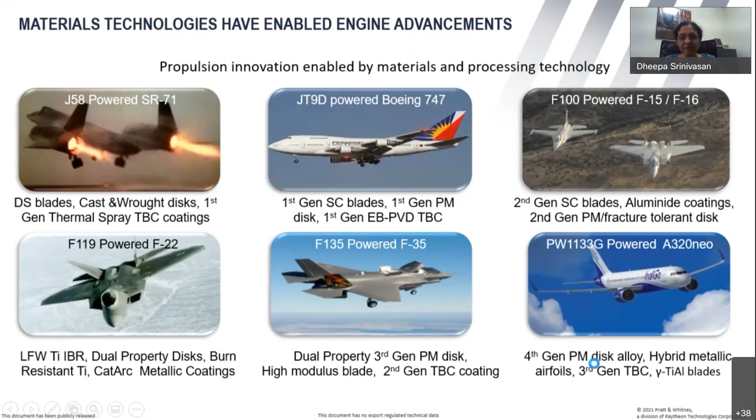I'm not going to read out every one of them, but taking off from this particular slide, if I go to slide number 3, this gives you a chronological view of different products, right from the 1960s to 2021, where we are today. What you can see here is that over 6 to 7 decades, all these engines are still flying.

That's the whole point. If you look at the development of an engine from one to the other, it has taken at least one decade: 1960 to 70, 70 to 80, 80 to 90, 90 to 2000, and so on. Typically for any new product development, it takes roughly this long - we're seeing Airbus A320, then the Boeing 737 MAX, and so on. Each of these takes billions of dollars to qualify a single part, a single material, or a single manufacturing process.

That is the kind of time and effort taken for each new product development. And given that, this is important - this yellow color, all these are still flying. But today, with additive manufacturing, metal additive manufacturing, we can definitely cut short this product development cycle. If you cut short the product development cycle, you naturally cut short the time and effort involved also.

So that is where I see the emphatic benefit of additive manufacturing. Definitely all these other benefits other speakers will also speak about, and you'll all know about - namely, making things hotter and lighter, especially for the aerospace industry, whether it's space, aerospace, ISRO, NASA, whatever it is. Anything that is flying up in the air has to be light. Anything that is hotter is going to have several benefits in terms of performance, in terms of thrust, that you can get for flying higher, shorter takeoffs and landing, lower time of return for maintenance and overhaul. So many benefits it can have.

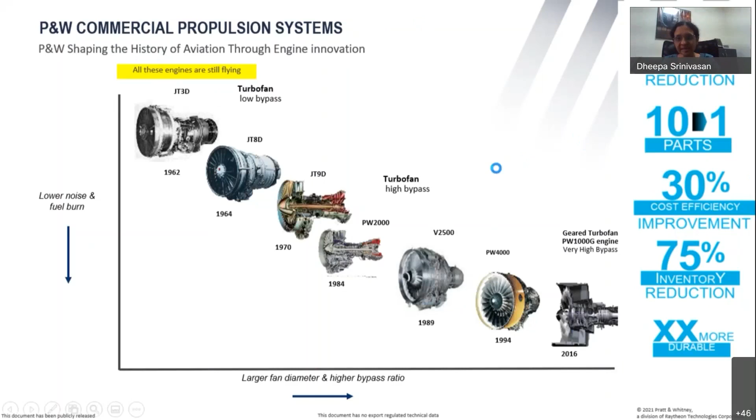If I go to the next slide, this tells you the Pratt & Whitney journey itself in recent times. I don't have the latest of 2021 - this is dated 2020 at least, so it's not very old. If you look at it with respect to the previous performance matrices I showed you, you can have design for additive manufacturing. This is a picture from a military engine, TJ-150 hot section component. True enough, there is a part reduction and a weight reduction - you see 99% reduction in count and 2 times mission life at maximum exhaust gas temperature, and the operability has not changed - it is equal to the baseline.

Similarly, in another commercial engine - this was a military engine example - you see a rotating fan module, you're going to have a 105% fan red line. This is terminology for an improvement in performance. This set of additively manufactured components has seen over 400 cycles and 200 hours of ground tests. Naturally, flight testing has to be concurrent with every aero engine part - without that, it will not get qualified. So on and so forth.

So this is an example of an integrally bladed rotor - IBR is what it's called. Conventionally, we make a rotor, a large rotor disc, and then we make these blades. Let me show you - I think I have a blade here with me. Let me just bring that out.

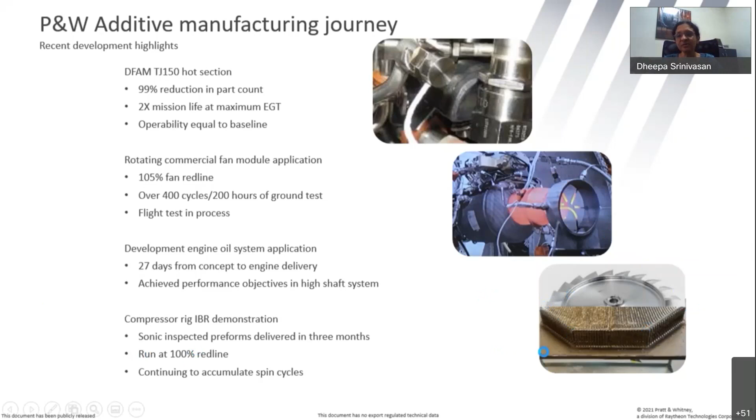This is a hot section. The hottest gas from the combustion chamber impinges on this, and it rotates the turbine module. So what you have here is an integrally bladed rotor, also called a blisk. Additive manufacturing is one of the biggest advocates for something like this, because you can truly get a weight reduction by making it into an integrally bladed rotor.

So these are some of the Pratt & Whitney journey. And if you look at our entire organization, I work for what's now recently called Raytheon Technologies, which includes Pratt & Whitney, which makes the engine you can see sitting behind me here. You also have all the other aerospace parts that go into an aircraft, as well as all the parts that go into defense technologies. We're called Raytheon. So several thousands of these parts have been made for visual rig and engine tests.

A few of them have got qualified, not everything has got qualified. So I'm sure you'll hear of many qualified parts. Today, if you'd asked me 5-6 years ago, there would have been a handful of parts. Today, a lot of parts have been qualified by the Federal Aviation Administration (FAA) to have these even in the engine, including stationary and rotating parts.

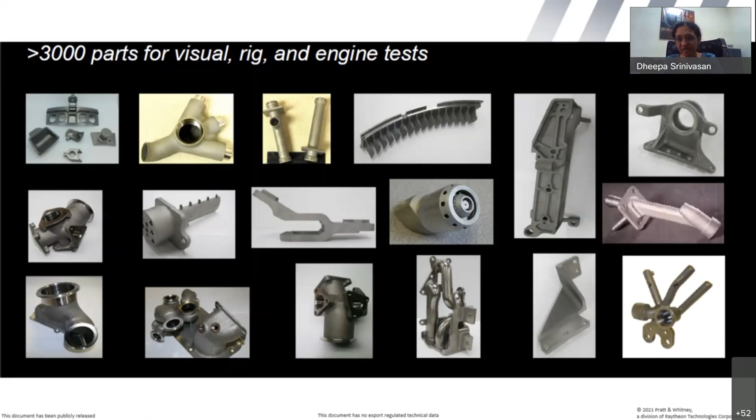So let me start with the preamble. All of which I'm sharing today can be seen or is available in this review article that was published earlier this year in the Transactions of the Indian Institute of Metals. It's a Springer journal. They brought out an issue to commemorate the Platinum Jubilee year of the Indian Institute of Metals. This came out in June, and everything I'm speaking now can be found in that. But what I'm going to focus on is the different metal additive manufacturing techniques as classified mostly by ASTM and ISO committees.

There are many others people call it, but primarily they talk of laser powder bed fusion. When we talk of additive manufacturing, literally laser powder bed fusion is a technology that has about 70 to 80% of the market share. And then you have laser direct energy deposition. You also have electron beam as a heat source. And then more recently, there's a technology called binder jet, which is neither electron beam nor lasers, neither wire arc.

So there is no melting of powders by any type of heat source. Instead, what you have is sintering that is taking place. So you mix ceramic binders - it's akin to powder metallurgy technology. You mix ceramic and metal powder particles, and then you put them through the layer by layer process, as is the definition of additive manufacturing. And instead of melting and solidification, you're doing sintering of the powders and getting the near net shape part.

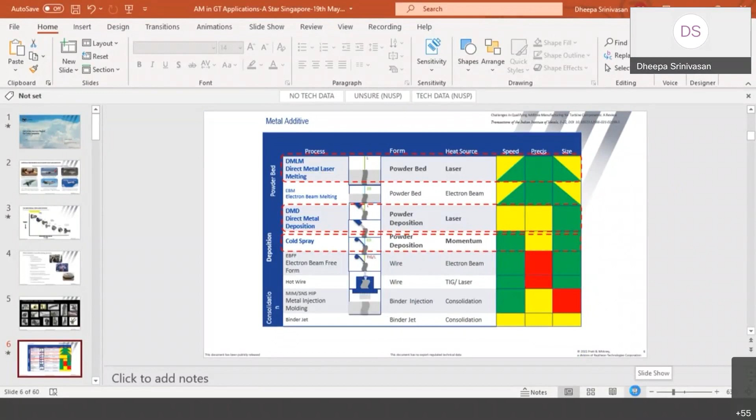So these are the different attributes, and as I said, lots of people will talk about it. This is very important, especially if you're going to translate research and development activities into a product. So it's better to start with a well-known additive manufacturing technology, and then try to see what the different attributes of it are towards your final product.

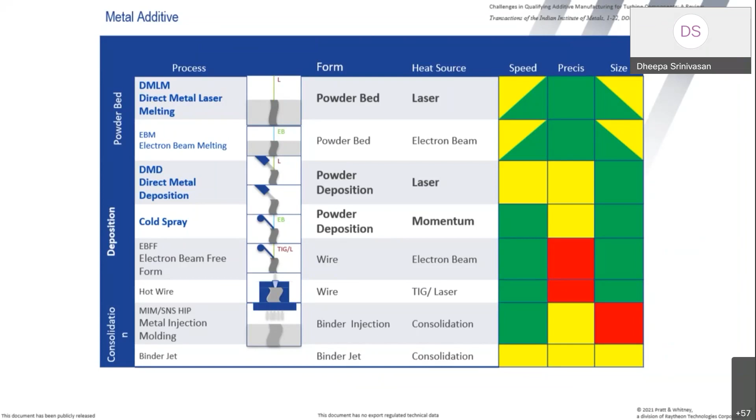Of course, there's no guarantee that everything will work for every part that needs to be qualified. For example, a huge rotor in a gas turbine - obviously I'm not going to spend my time and effort trying to convert that into additive just for the sake of it. If something works well in conventional manufacturing, we let it stay as is. If something has a great advantage as shown in the performance indices, then we try to look for the right approaches to use it. The starting step is this one, what I'm showing you on this page.

If you overall look at the additive manufacturing processes - I'm sure all the speakers will tell you this in this workshop - it is a highly complex process. What you can see here is there are at least 3 dozen process parameters needed in order to get a single density, even a simple thing like density without any porosity corrected. And then there are also a lot of...

process related parameters. I'm talking of this conceptual stage, which is what most of us in research universities or research labs start with - namely starting with a new material or an existing material for a new design or for a new property we want to research. We need to be cognizant of the fact that there are at least 2-3 dozen parameters, notwithstanding the fact that we have to look for uniformity, heat transfer, all the metallurgical aspects, and residual stresses. So many things are there.

And last but not least, we have to go even from concept to the feasibility stage - I'm not even talking of developmental stage. Then you need to make sure you have enough non-destructive inspection processes that will aid you in gauging the reproducibility and repeatability of even a simple coupon for doing lab scale tests. So all these are very much in need of the day.

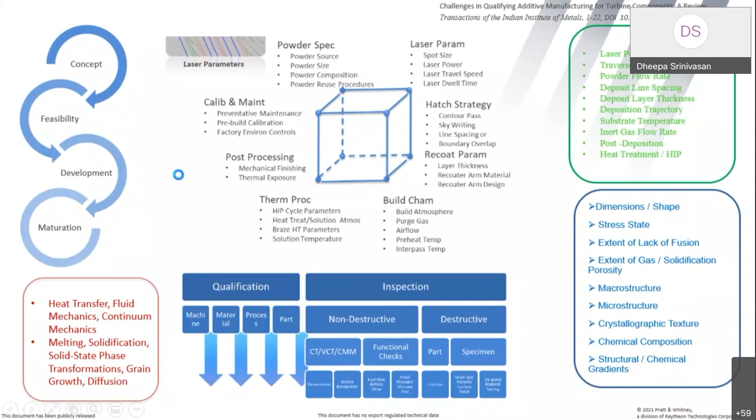But before I even consider starting work in this particular area, especially towards taking it from the conceptual stage to feasibility stage through to developmental stage, you need to be cognizant of all the metal AM challenges. So what I've done is put together a whole bunch of challenges that I have faced. I'm sure this is not exhaustive in taking into account every single manufacturer's challenge, but it is extensive all the same.

Starting with design, what are the manufacturing processes, the cost and return on investment, then development of or lack of standards, and inspection technologies. Through the next hour or so I'm going to be speaking about 10 of them, giving you examples of case studies mostly related to materials, mechanical properties, and inspection. In each slide I show you, the challenge will be circled and numbered so we can relate to it later when you want to ask questions related to that.

Okay, so typically one of the biggest advantages I have seen of metal additive manufacturing - and most of the studies I'm going to be sharing are in repair and refurbishment of gas turbine hardware. It's also particularly relevant repair and refurbishment, especially in a workshop like this. I wanted to share this because here I'm giving you a perspective of additive manufacturing versus conventional manufacturing.

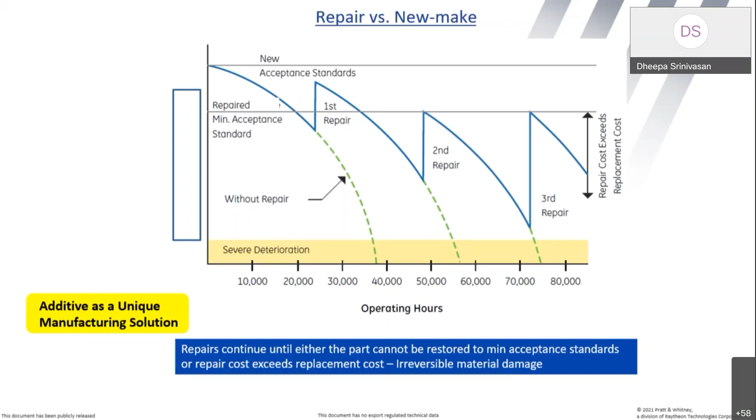And so I'm going to take these case studies for highlighting the challenges and how we overcame them, and how we can use metal additive manufacturing as a unique solution that no other conventional manufacturing technologies can offer. That is the low hanging fruit. Of course, we can always try to keep making new parts.

And just to give you an idea, in slide number 10, I'm sharing that I have personally worked on several repairs, as well as new make, on over about 2 dozen alloys that you can see here, many of which you will recognize because they're all popular alloys by now. So I worked on hot section blades, tips, nozzles, and so on, including in the automotive industry, conformal cooling using maraging steels, using all three: laser powder bed fusion, direct metal deposition, and electron beam melting, on a broad range of alloys - nickel-based superalloys, cobalt alloys, aluminum alloys, steels, and titanium alloys.

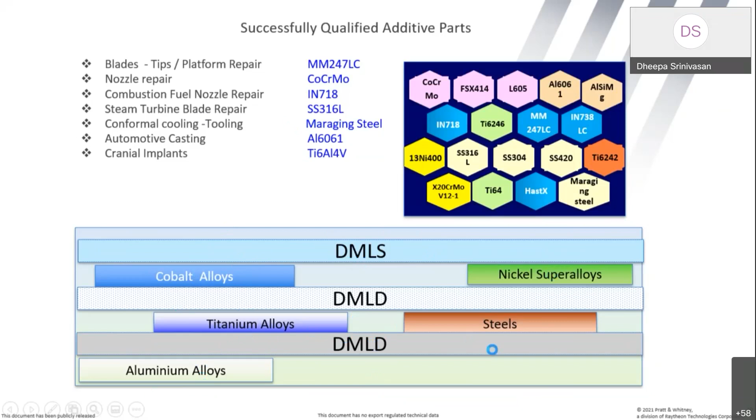So I'm going to start with this example. This dates to 2015. And when we proposed this idea, wherein the stage 1 nozzle or vane of a gas turbine underwent hot corrosion. And it keeps happening all over the world in several gas turbines, especially for industrial gas turbines, wherein the petroleum or the fuel that they use to combust is not very pure. It has all kinds of, and when combustion takes place, emission takes place. We all see emissions - all sorts of carbon monoxide, carbon dioxide, sulfur dioxide, so many other emissions that will cause what is called hot corrosion.

So you can see the vane, the trailing edge of this stage 1, the first section to see the hottest gas.

You can see this like a moth-eaten leaf - it has got severely damaged, and all these vanes were discarded. So what we did is we came up with a solution 6 years ago, when additive manufacturing was not such a big buzzword, but we were a little ahead of time for this series of experiments and qualifications done for gas turbine hot section components, wherein we proposed two things. One is, let us cut off the damaged part and make an additive laser powder bed fusion insert or coupon.

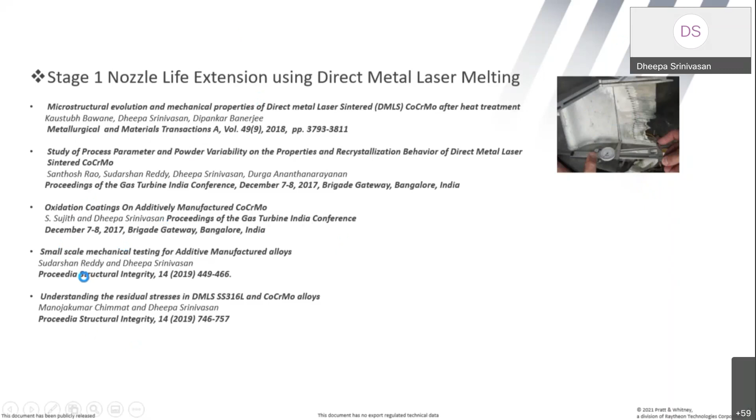So fortunately, during that period, at least 4 master students between 2015 and 2017 worked with me, and some of the work we've been able to present in conference proceedings and publications, and that is what I'm sharing here.

So what we did is, as I told you, the base alloy was an investment cast FSX 414, that is a cobalt tungsten alloy, onto which we said, let us cut off the damaged part near the trailing edge and deposit laser powder bed fusion cobalt chrome moly, as you can see in the schematic here.

Then after this geometry is joined, let us weld these two together, the cast FSX 414 and the powder bed fusion cobalt chrome moly. Let us manually weld it, and then implement the part back into service after post weld heat treatment.

So what is the starting step out here? The starting step is to actually map the process parameters to give a part with 99.9% density. So that is what this is - cobalt chrome moly - and this is being attached to an investment cast FSX 414.

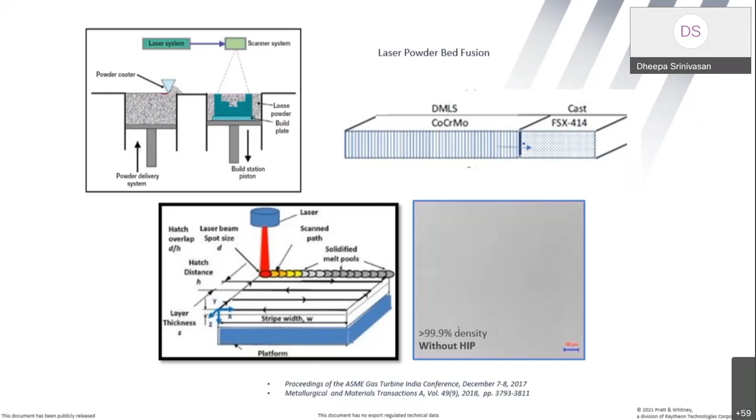We looked at, as I showed you a couple of slides ago, the kind of complexity you have in the powder bed fusion technology. So what we did is we optimized - this was a master's thesis of a student from PSG Tech - very quickly in February and March of 2015, a design of experiments based on laser power, scan speed, and layer thickness in the powder bed fusion process in order to actually get a dense part.

So our y equal to f of x is going to be, x is going to be all this, and the y is going to be the porosity. That is, it should be as dense as possible, because this is a hot section part. We cannot afford to have stress concentration related factors by having something with defects, already inbuilt known defects. It has to be a dense part, as much as any conventionally manufactured process.

So having done this, then we got a whole bunch of microstructures. When we started, it was quite scary because we did get a lack of fusion at every single layer, and a lot of porosity that crept in, either due to entrapped gas or moisture or whatever. But soon enough, we optimized the process parameters and tried two conditions, one with hot isostatic pressing.

And normally this hot isostatic pressing is done for all the hot section parts, irrespective of what part it is in an aero engine, so that you delay fatigue failure due to inherent defects. Typically hot isostatic pressing is done to close the pores in the grain boundaries in order to enhance the creep resistance of the material.

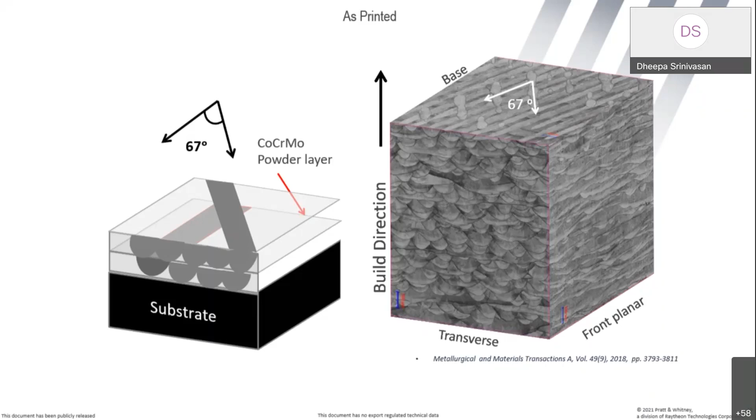In this case, we looked at the three-dimensional view of the microstructure. You can see the weld pool like this, the left-hand side cartoon, and on the right-hand side, this collage that has been made showing all the weld pool. There is a one-to-one correspondence between the left and the right, being the actual real coupon that is being tested, and very fine interdendritic microstructures you can see here, very, very fine.

So of course we went on to analyze the as-printed structures, and you can see here a dense sample without hipping. You can also see the etched microstructure here. And then we went on to observe whether there were any micro cracks. Yes, there were some micro cracks. It is impossible to make a material without any defect at all.

And then if I blow up the weld pool boundary, what you can see here is fine athermal HCP plates, which can only be discerned in the TEM, but nevertheless, we were able to see it in the SEM.

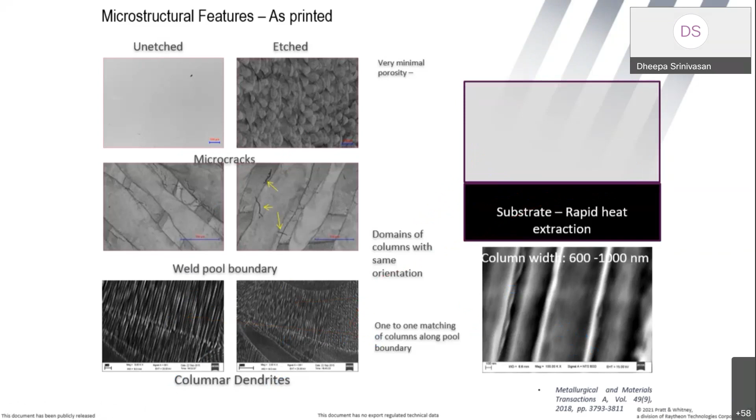And if I look at the heat extraction, from this - this is supposed to be a video, but it's okay, it's just coming like that. So you can see that there are domains within the weld pool, within one weld pool. As you look here, there are domains of similar orientation out here. And then this sometimes translates between one weld pool to the other.

So further, there were athermal HCP plates between 600 to 1000 nanometers, less than 1 micron, running all the way through. Remember, the metastability out here. So that is sort of the second challenge I'm going to come to. But before that, I'll show you the different advanced characterization that we did to discern what is happening in this material. Is it in a metastable state or is it in a stable state? And what do we mean by that? Will there be thermal stability?

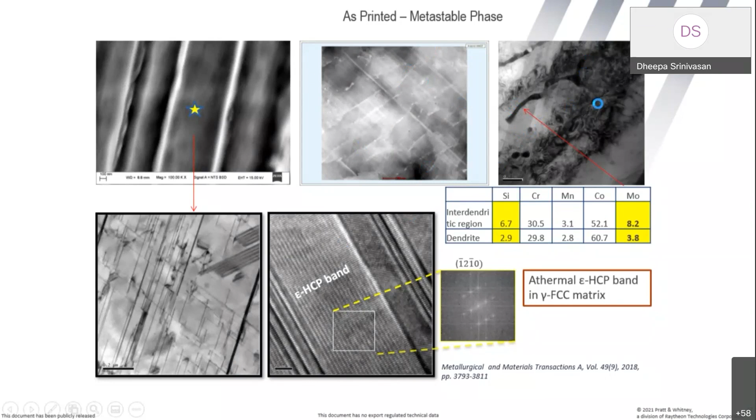So to summarize the microstructure, in the as-printed condition, you see athermal epsilon HCP band in a gamma FCC matrix. Of course, there are pockets of precipitates, a whole bunch of precipitates out here. We have discerned the nature of this precipitate from this high angle annular dark field image, and I'll be sharing that with you shortly.

So then we went on from the microstructure. We need to give the pre-weld and post-weld heat treatment, because remember, we are going to weld this particular part to the cast FSX 414. And here, as I said, one of the biggest challenges - yes, we were able to do a whole bunch of heat treatment optimization. Again, this is another master student's thesis, in order to get a nice recrystallized microstructure, such as what you see in the right.

And here we kill two birds with one stone, namely the heat treatment that is necessary for the microstructural evolution of the additive cobalt chromoly, versus the actual microstructure that is going to correspond to the best mechanical properties.

So when we look at the microstructure, it gives a nice fine grain structure, not more than 45 microns. And here we're very thrilled about it, because fine grain structure means very good strength. But also we're a little worried, and that is challenge number 2 that I've highlighted here, because any fine grain microstructure is going to be a bane for creep response. This is going to be really bad. It's going to be creeping like crazy, because grain boundaries are diffusion paths, especially at temperature.

But nevertheless, the challenge I'm trying to highlight here in number 2 is we must pay attention to the heat treatment optimization, which actually is a blessing for via additive. Because of the rapid solidification, you are able to get different microstructures that are conventionally not always obtainable.

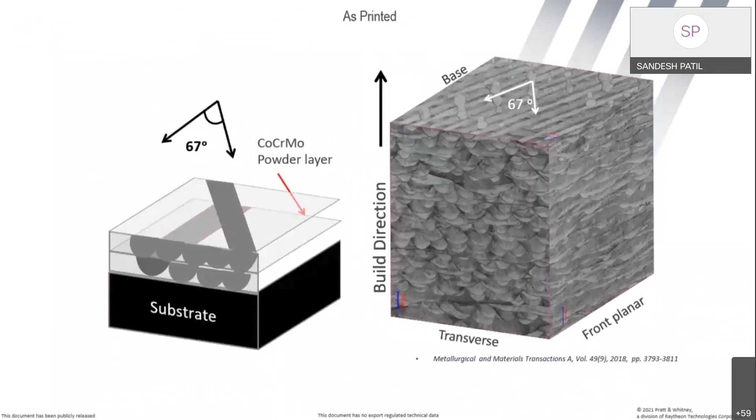Okay, I just wanted to highlight one point in this challenge 1, which I forgot to mention. I'm not referring here to the aspect of getting dense samples - that is almost a no-brainer these days. With the kind of software development that has taken place by additive manufacturers, by Magics, by ANSYS, by several people, we are able to get good parametric conditions to get dense samples, irrespective of which alloy in the series of alloys that I showed you.

However, the true challenge that we faced here is, despite running through a very exhaustive DOE, design of experiments, we are not able to get statistically significant numbers between these energy densities in order to finally choose which of these process parameters will be best suited for our application.

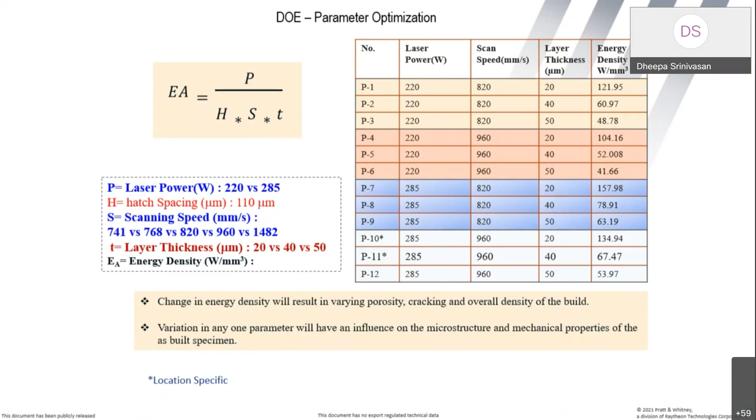So what I'm saying is, all of these give dense parts greater than 99.5% density, in which case, which of these energy densities and hence these process parameters will you follow? I'm not saying it happens for all alloys all the time, but challenge number 1, not being able to meet a statistically significant result, is something to recall and think about.

And it was a challenge for us, because we had to do the entire project in less than 1 year, right from the concept to the design stage.

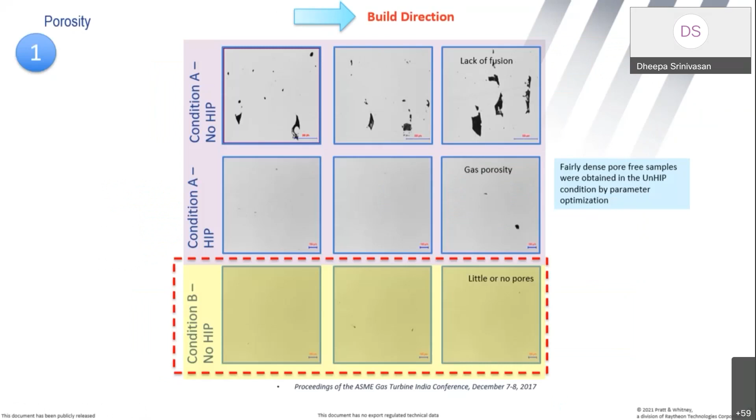Okay, so I'll go back to challenge number 2, which we just completed. Namely, what you have is a microstructure which is metastable. I've been able to get a uniform isotropic recrystallized microstructure by combining the post-weld heat treatment process with the heat treatment necessary for this particular alloy via additive manufacturing.

Now, whenever something is strong, we expect the ductility to drop drastically. Luckily in our case, the ductility has not dropped much. So this itself is a big progress, in terms of having high strength and no loss in ductility.

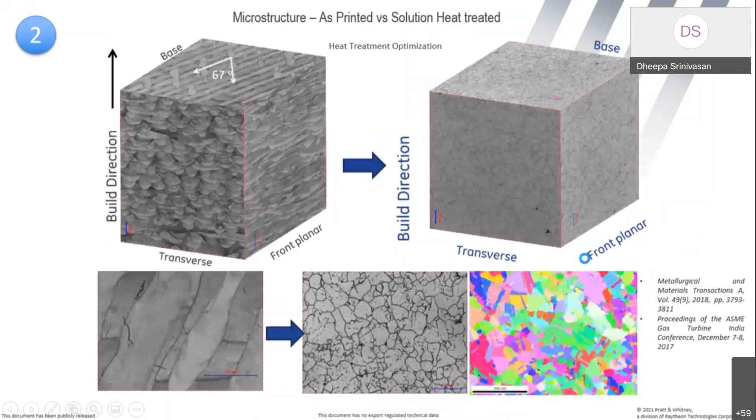So I'll again share an example of that. Going back to the case study, we were lucky that despite having a fine grain structure, since it was isotropic, there's no problem.

When we did the creep test along with the samples sent for various orientations, we found we had a very slow creeper in this particular cobalt chromoly, without any hipping, in the new material we developed. Of course, can we stop there?

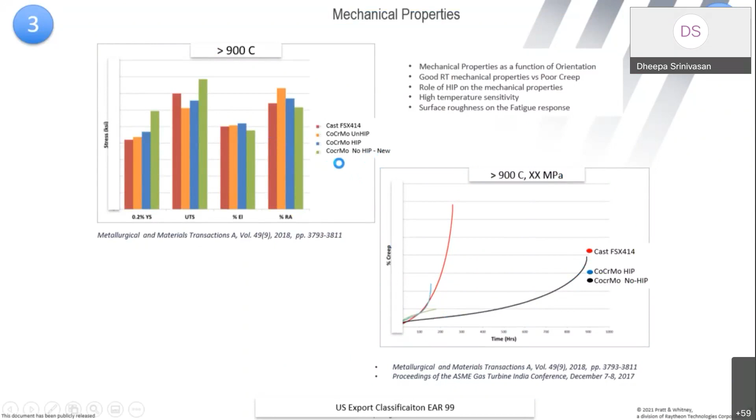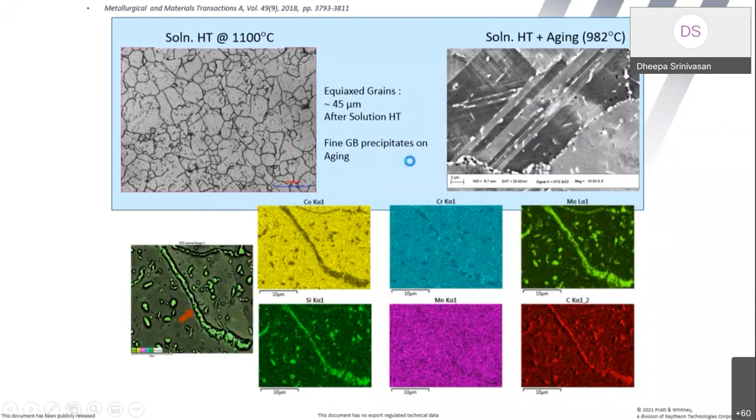In order to proceed further and evaluate the thermal stability, we have to have a thorough understanding of the microstructure. This is the work of another master student from NIT Trichy during the same time frame, who helped us decipher what is present along the grain boundaries and why this microstructure is a slow creeper, when it should have been a very fast creeper. We found it to be a much slower creeper because all the grain boundaries are pinned by these precipitates, black and white. I won't go into the details except to say that the fine grain boundary precipitates come on aging. Now we come to challenge number 5.

What does that prescribe? You all know surface roughness is a big issue in additively manufactured components. Even if it is an external surface, you can add a little more material and then conventionally manufacture that component without having high surface roughness — it can be very low. But you all know surface roughness is especially an issue internal to the geometry. Externally, at least you can give allowance. If you look at the surface, I can add a little bit more here, like this.

Let me just see if I can annotate here. Don't know where the annotate function went. I think it's... maybe this. Okay, it's not coming. It's okay, I'll just close this. Now let me just draw and show you. It says I can annotate, but let me rub it off.

So what I'm saying is, if you look at this, I can give a little more print and machine it out — I can do process parameter optimization here. But if it is a conformal cooling hole or a fine cooling hole in a turbine blade or vane, how will I machine it out? There won't be any accessibility. So surface roughness is a big challenge to be overcome.

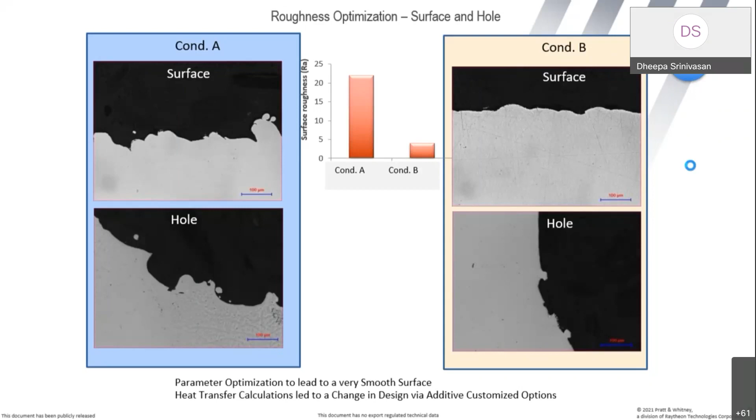We move on to the sixth challenge. Having addressed these issues, we next tried to build more coupons — we call this a trailing edge nozzle coupon in the build plane. However, when we tried to do that, we encountered challenge number 6, which is very important: residual stresses that creep into the component. Now, all of us in the welding world have definitely come across residual stresses, as the weldment will be in a tensile stress state. However, here, additive manufacturing is a layer-by-layer welding and solidification process.

So what is the sixth biggest challenge? Residual stress. Sixth one, what we did is then we did a flat coupon.

We estimated the residual stress by a through-thickness XRD, X-ray diffraction sine square psi method. But that is not good enough to tell me what are the stresses inside the cooling holes. Wherever, it doesn't tell. So we had to...

Alongside, we had to establish the residual stress in the geometry numerically, by using finite element analysis. We took the geometry and we started by taking the physical metallurgy inputs that feed into that. And this was a collaboration with one of the NITs, actually.

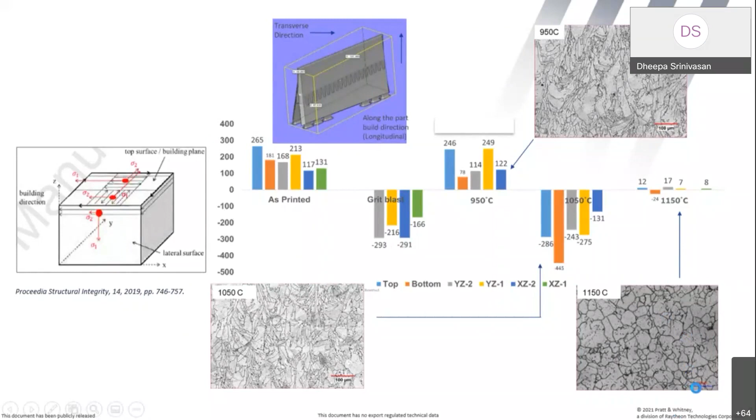Seventh challenge is really an important challenge. It's also a very, very thrusty research area. Those of you who have that kind of background may well take this up. The research area here, namely, since the whole business of additive manufacturing is near net shape part manufacturing, how come we still use ASTM test blocks and test standards for evaluating the mechanical properties? It can be a big challenge in more than one way.

Why? Because the true development of a part like this, like a cylinder, and then machining out dog bone specimens, may not be representative of the process parameter optimization that I spoke to you of in challenge one, vis-a-vis the actual part geometry like this. So there may be large variations, and that is truly a challenge we are facing in small scale testing.

ASTM and several of the committees have taken this up in a big way. Small scale mechanical testing is very, very imperative to develop and establish in the next 10 years, in order to truly qualify and acceleratedly qualify additive manufacturing.

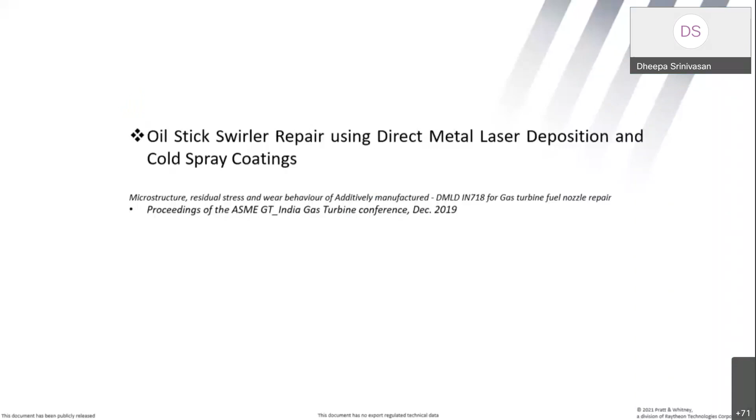So I've come to the end of this. I think I have probably finished in an hour. If we can pause here and take some questions, and then I do have other case studies which I can share afterwards, or how would you like to go about it?

We can have some questions first. Yeah, because I wanted to end this challenges part and then show you more examples, taking all these challenges. I can show you, we have some more time, how we have overcome some more parts that have been taken for qualification.

So, notwithstanding all these 10 challenges, what we did is we qualified not only the cobalt chrome moly that I showed you in this case study, but we did qualify a number of components by utilizing this approach right from day one, till whenever the project got completed, which is maybe 10 or 12 months later.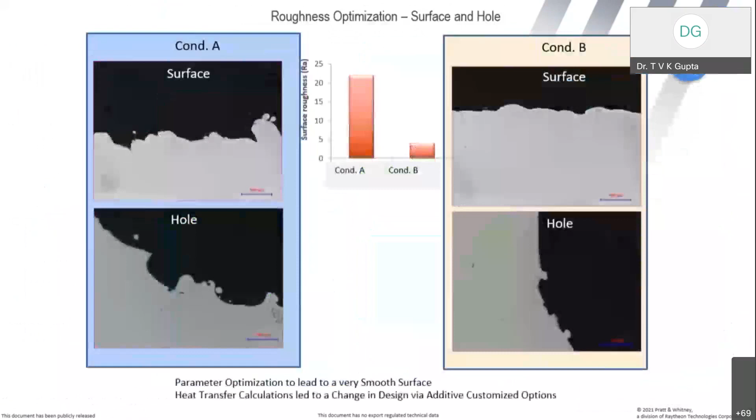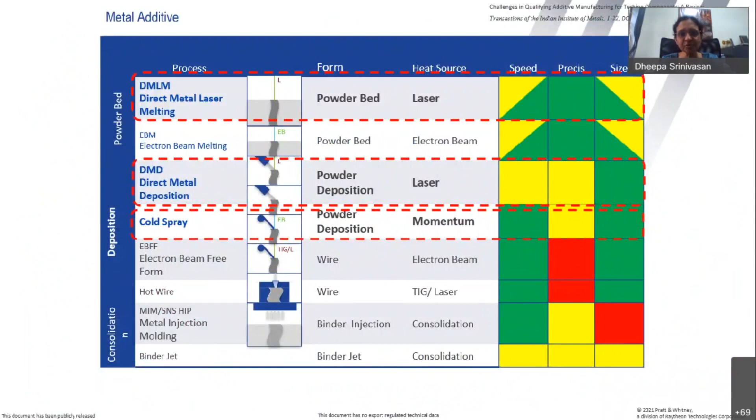Electron beam melting is also done in a sort of inert atmosphere. Only direct energy deposition and a few others don't need an inert atmosphere, irrespective of the material, because you have to do extensive post-processing anyway. The size and speed and throughput are also very good. For example, titanium chambers - ISRO uses this, a lot of bottles in space shuttles are made this way. Large structures - NASA, everybody is using it, even VSSC is using it. In those cases they do post-machining using conventional manufacturing, so it depends on the nature of the application.

It is not so much about the material, but with respect to titanium, I would rephrase the question differently: titanium is very, very prone to oxygen sensitivity. So the powders, or wires, whatever form, but mostly powders, have to be handled very carefully to avoid any oxygen impurity, because titanium alloy is very sensitive to oxygen pickup, and the microstructure and everything changes, both in conventional as well as in additive manufacturing. I hope that answers your question.

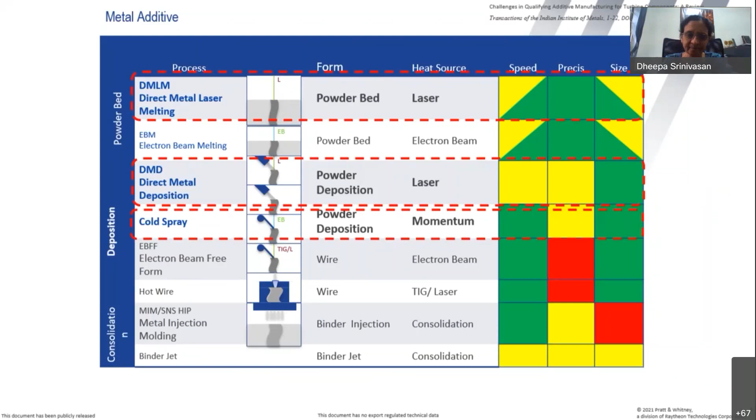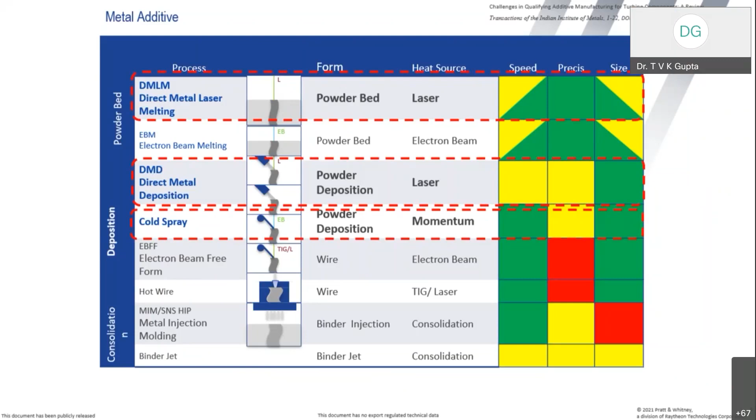There is one more question in the chat box: you correctly said it's difficult to adopt ASTM standards for additive manufacturing process optimization, but what other standards could we go for? Actually, I didn't say it's difficult to adopt ASTM standards - let me make a small correction. All I said is we don't have ASTM testing standards for very, very small scale miniature testing.

Let me give you an example again. This is 3 inches, okay, you can see the blade - are you able to clearly see it? If this is what I have made using laser powder bed fusion in a layer by layer process, I might have put a support structure somewhere here, a couple of support structures here.

Let's say I've removed this, this is my part. Now, if this part has a very small section thickness here, a slightly different section thickness here, a different one here, a different one in this angel wing, it is completely hollow here. So this is practically hollow.

I'm trying to show, somebody took it off this morning. Let's say this is a cylindrical sample, a dog bone specimen, like how, let me show you. It is right here. So if I'm going to take this one and machine it out into this dog bone specimen as per ASTM standard testing, that is not going to help me exactly evaluate the structural integrity of this near net shape part. That is what I said.

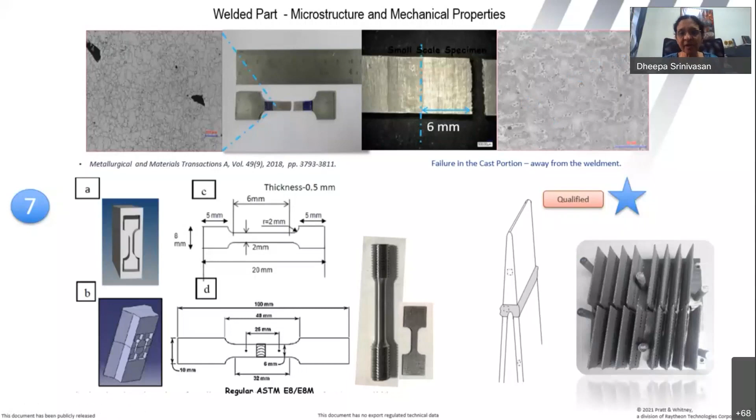But my nearest equivalent is cast FSX 414. So when implementing this in a case study like this, I took this as my reference, and I said my additive part has to be better than this. A lot of people are working on developing standards to answer your question. Some standards are already out there, but it's still a very active research area, and a lot of people are writing proposals, a lot of funding for this area, as well as inspection.

Does that answer your question, ma'am? Yeah, thank you. Sure. Any other question? I need a small help, ma'am.

Actually, we were also trying to do some metal components using Inconel 718, but there we are using the laser cladding process. We had just started working about 2.5 years back. But with IN 718, we were thinking of residual stresses also, and we were unable to manage, to evaluate these residual stresses. We are also facing that problem.

So, is there any other method? Because right now, whatever components we made, we were doing residual stress tests using XRD from IIT Bombay, but they were not very encouraging. So I don't know whether we are making a mistake in the deposition or the process we are adopting, we are unable to understand it.

No, but what is your question? See, for residual stress evaluation, there is X-ray diffraction, sin-squared-psi, or there is neutron diffraction, which is not very easily accessible because in neutron diffraction, the penetration depth is a bit more. But the fact of the matter is, residual stress experimental measurements are only through thickness, meaning it can go from the surface to the bulk on a flat sample. But it'll only give you surface values or up to a few microns, so you need to keep removing material.

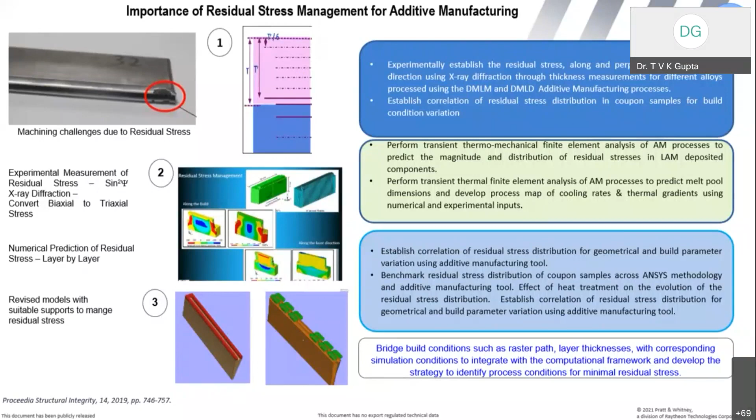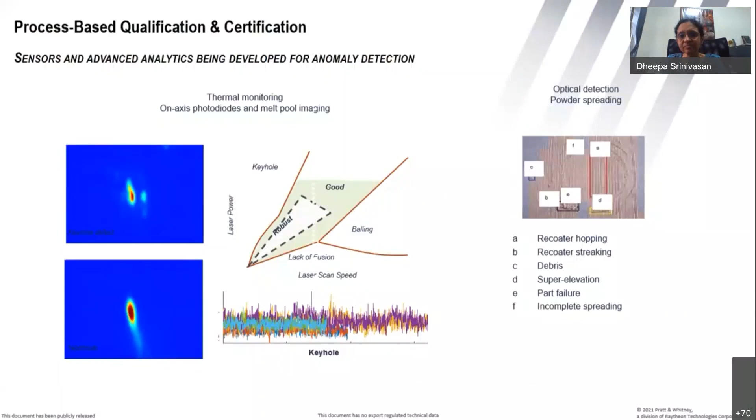Okay, if you don't have time, ma'am will show some of these case studies, or is it done, ma'am? It's up to you. We have another 5-10 minutes left till 11 o'clock, 5 minutes more actually. Shall we take a couple of questions and close it? I don't think I can finish running through a case study in 5 minutes, it may take at least 10 minutes. Okay, so are there any other questions? Participants, if you have a particular question, you can post it.

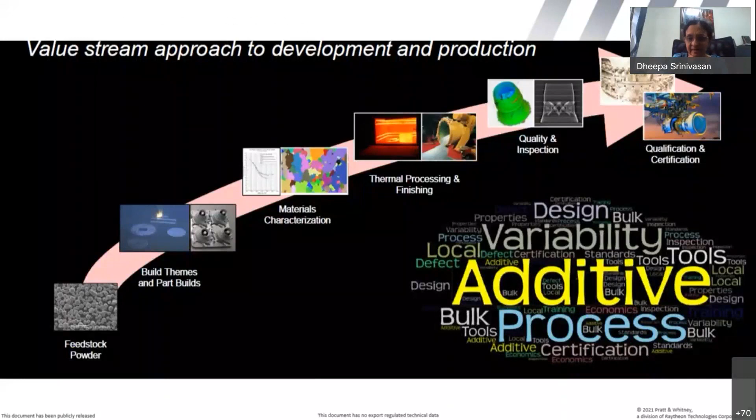If not, I'll speak a little more about the importance of the challenges in the 5 minutes. As I said before, you can take a copy of this. This is the DOI of this particular review, as I mentioned. I can also share it with you, Professor Gupta.

The fact is, when you're doing research in this area, there are plenty of research topics. What we normally do is take it at the coupon level, establish some mechanical properties, microstructure, very simplified, or maybe some corrosion studies, creep studies, fatigue studies. But when we have to take it from this level to accelerated production, there are lots of challenges as shown in this chart. That is when it is good to tie up research opportunities and problem solving, since adoption only comes when you're actually correlating these two, not just by taking the coupon level and studying.

For example, challenge number 3, I told you about metastable microstructures. Cobalt chrome moly is HCP, but it came off as FCC because of rapid solidification. That itself leads to segregation issues. And Professor Gupta, you spoke about IN 718. Despite having almost 250 papers published worldwide in the last 3 years, including the COVID year, we still don't know why there is a poor high temperature drop in ductility, or why there is poor creep rupture notch sensitivity at elevated temperatures. So Inconel 718, in spite of all these studies, one of the oldest additive manufactured alloys, has still not reached qualification for any rotating parts because of this issue.